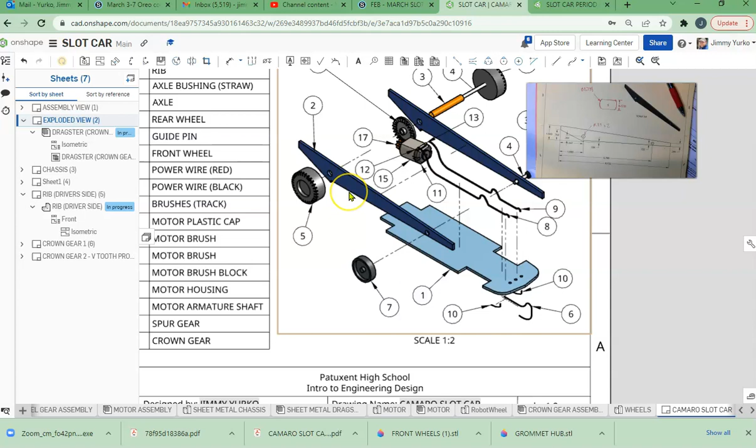Hi folks, right now we're going to go ahead and create the ribs, these blue ribs for our slot car. They are part number 2 on our drawing, and they are what's going to be attached to the blue chassis that we created the other day. And they provide us holes for the axles to pass through, and they add stiffness to the model.

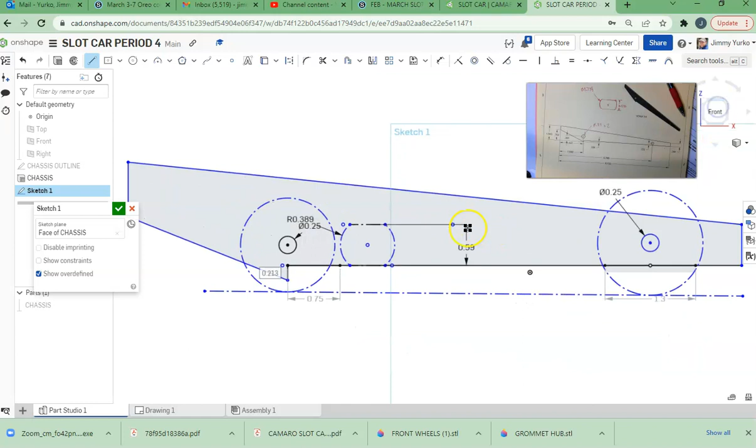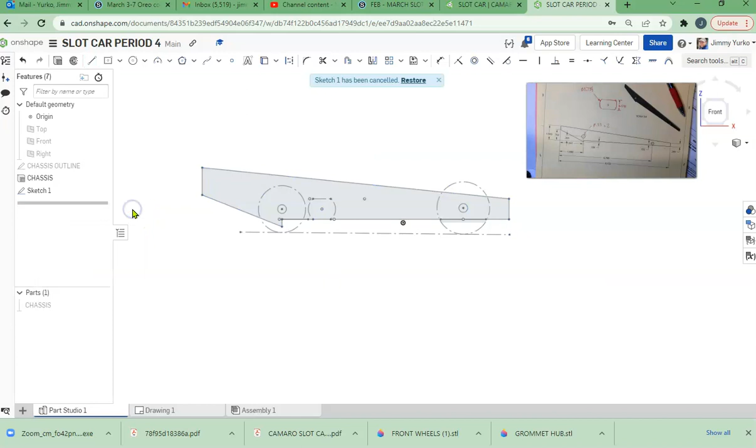The drawing we're going to create is going to look kind of like this. And I'm going to kind of quickly go over how to put these together. The process is pretty simple. I'm going to actually delete everything I have here and start over, just so you can see how this works. So I've got my chassis, and we're going to add a sketch to the plane that we want to put that on.

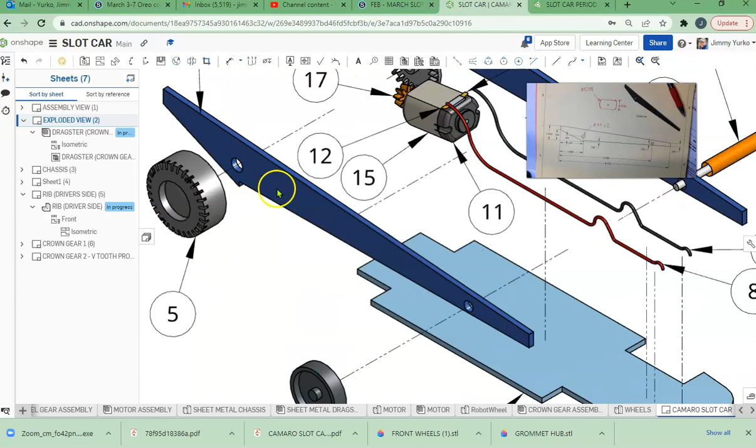So if you look here, the outside edge of this rib, this outer face right here, is going to line up with the inner face of the wheel cutouts. So we're going to go ahead and put that sketch plane on this vertical plane. That is where we're going to create the rib, and it will start here, it'll be drawn here, and then projected to the right.

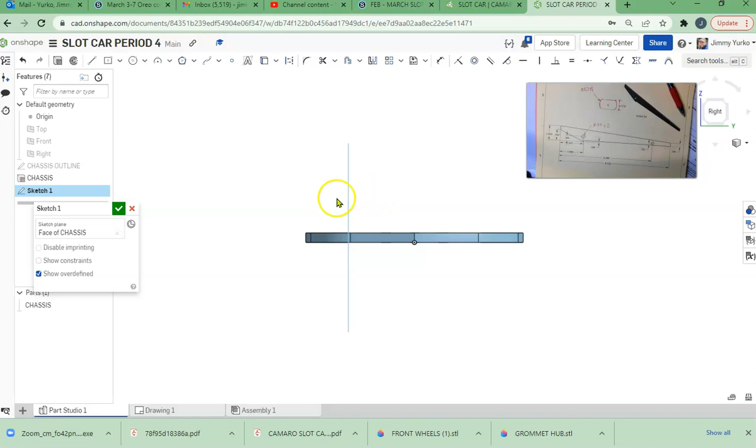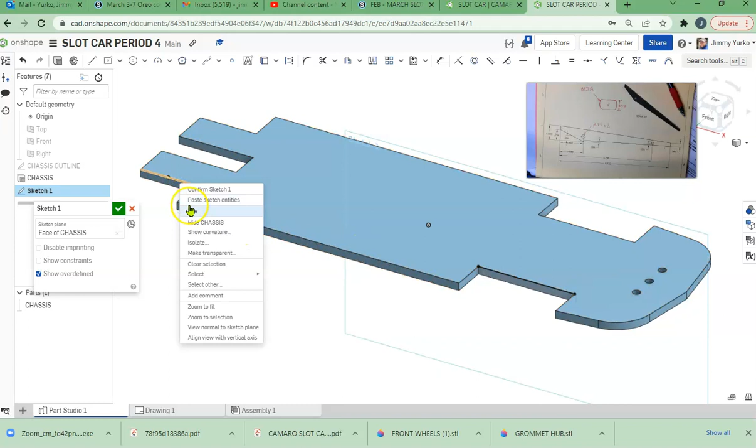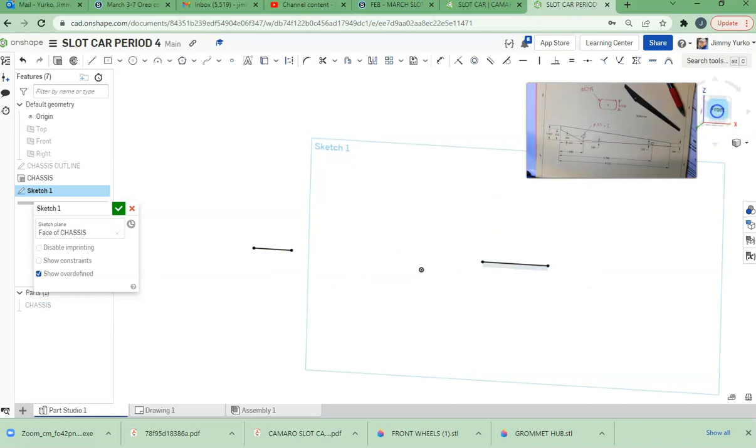We're going to need to take some of the existing geometry, which you can see is there. I can right click on the edge of the wheel well, and then right click on the edge of the rear wheel well. We now have lines on our sketch that we can use. And over on the left hand side here, I've got this eyeball to turn the chassis on and off so we can get it in and out of our view. For most of today, we're going to turn that off.

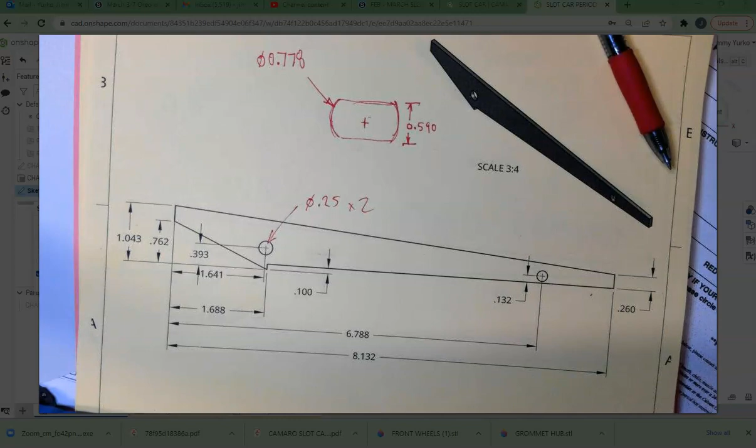We're going to be creating this shape right here. Here's our wheel axle holes, in front and rear. The rear axle hole is lined up above the back edge of our model. Let's go back to our model and see that the rear axle hole is off the back of the car, and the front axle hole is lined up over the center of that wheel well.

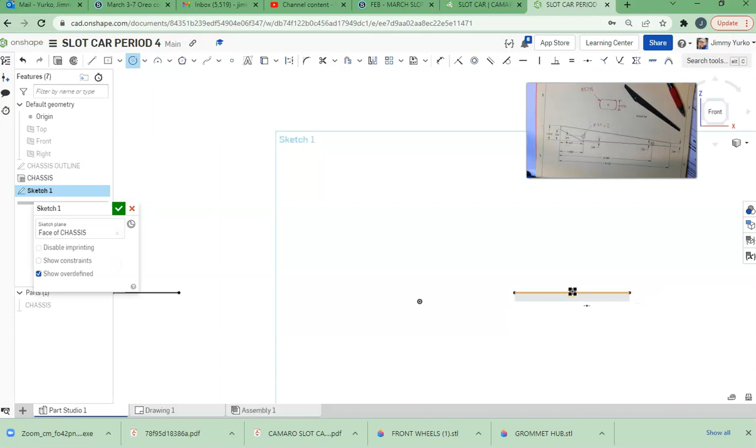Looking at our examples, we're going to take a circle, and I'm going to hover over the rear edge of our first line and create a circle. And then for the front, we'll find the midpoint. So a little square pops up, and you can see the midpoint constraint. That's the horizontal line with the bubble in the middle, above there. And that creates circles that are vertically aligned with those wheel openings.

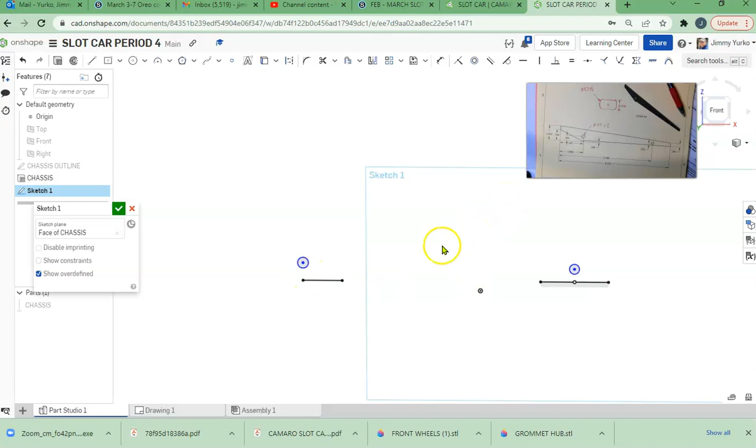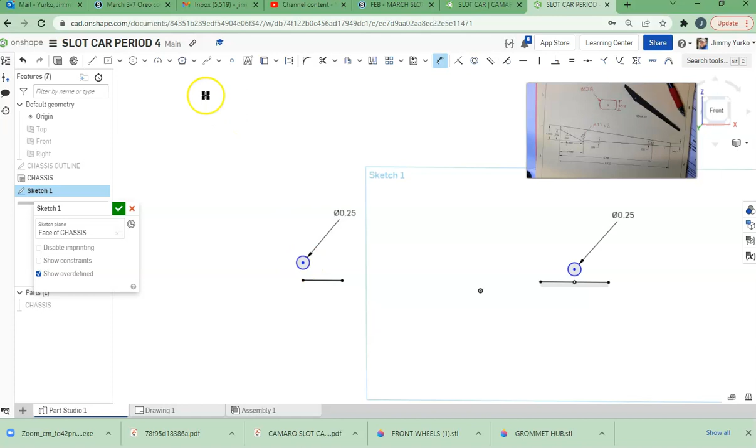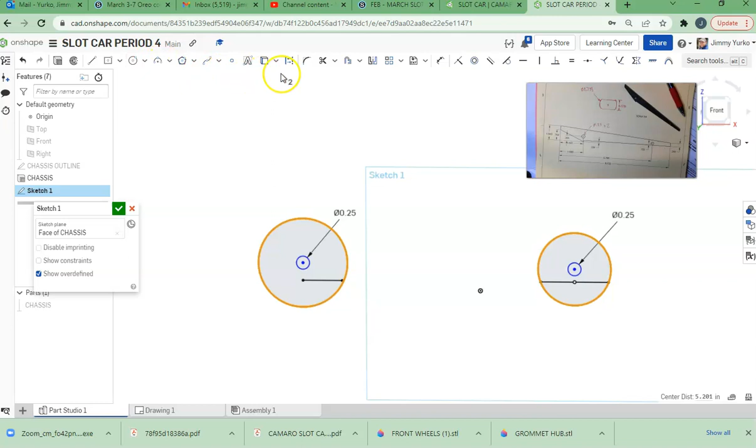And then we need to take into account how big are those? Let's make those a 1/4 inch. It's a pretty common size, easy for us to work with. And then we need to figure out how high they're going to be and how big they're going to be. Well, these are going to be attached to wheels. So let's draw those wheels, but we don't want to make those wheels part of our chassis. We're going to make those construction lines so we can just see how they relate to each other.

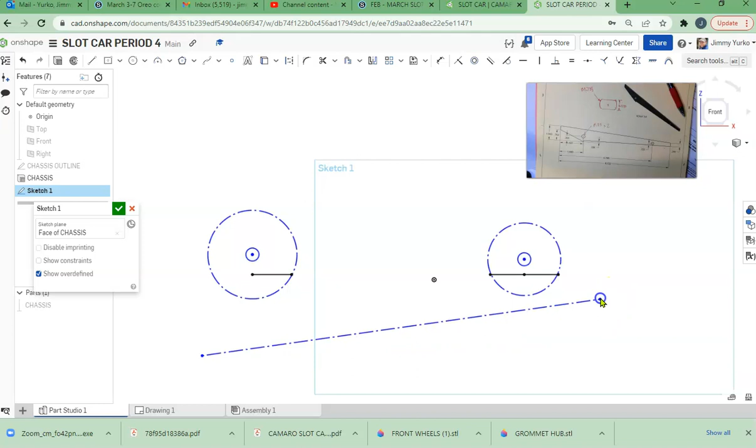And of course, those wheels have to ride on the ground. So I'm going to draw a line that represents the ground. And you notice that I created that intentionally at a really screwy angle, because I want to make sure that I'm able to move it. Of course, the wheel should contact the ground, so that is the definition of tangent. So I'm going to take the tangent tool and grab the circle and the line, and grab the circle and the line. So now my rear wheel and my front wheel are attached to the ground, and I can adjust my ride height for my vehicle.

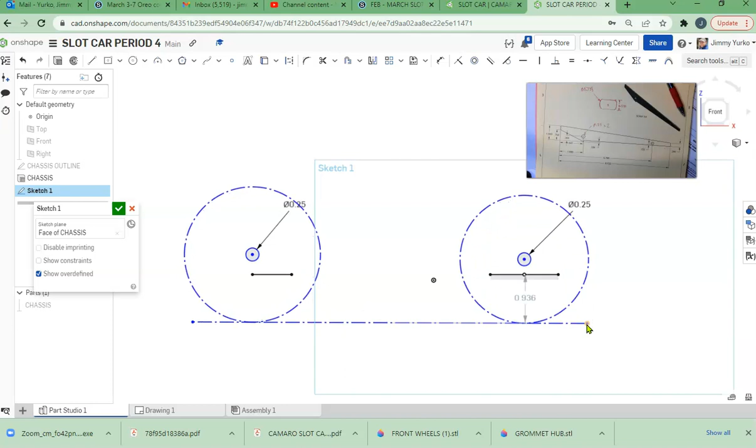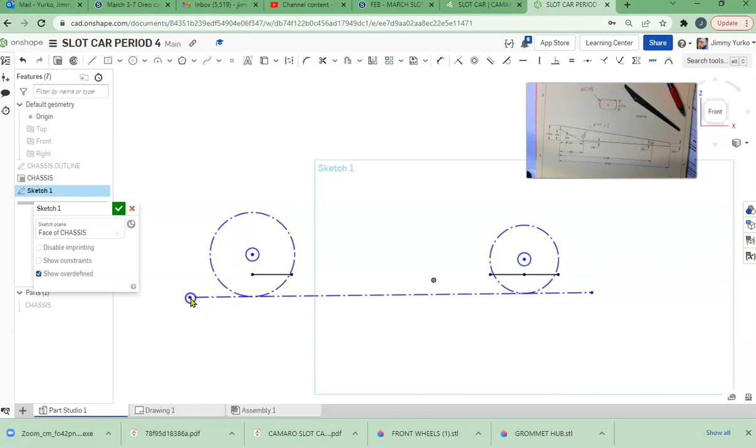So the bigger the wheels, the bigger the space between the ground and the bottom of the car. So here's the bottom of the car, here's the ground, and you can see that as those wheels get bigger and smaller, that ride height changes. I want to have a pretty short ride height, somewhere in the neighborhood of 1/4 of an inch. So it should be 0.25 inches. I can tweak that by adjusting our wheel sizes. Also, we can adjust the ride height and wheel size by moving the axle holes up and down.

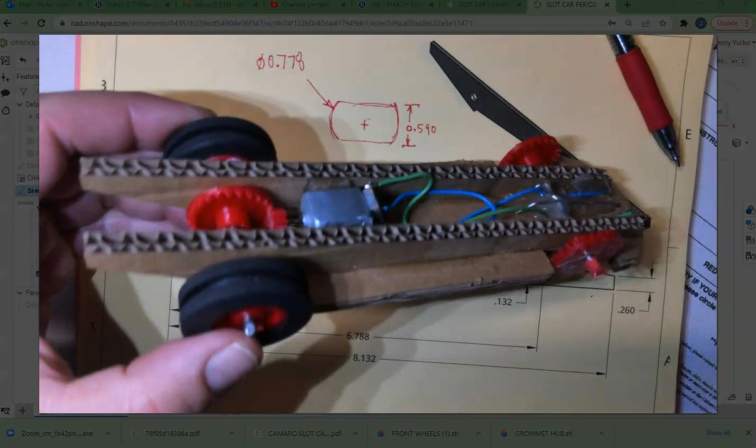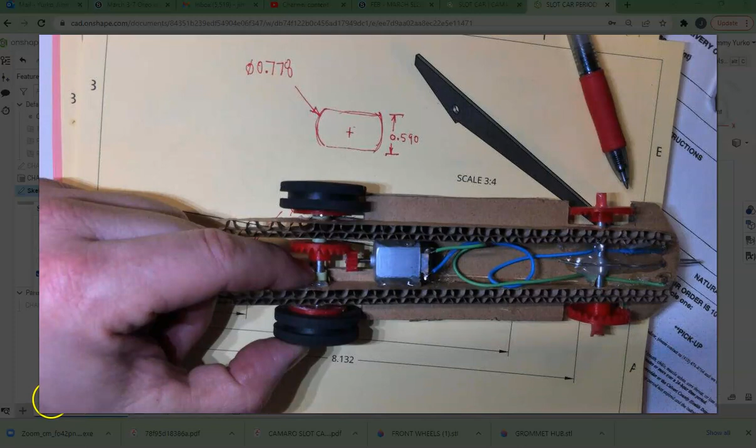We need to make sure that our rear wheel lines up with our motor. So you can see that on our slot car, we've got a motor that provides power to our wheels, and we want the center of the motor to line up with the center of the rear axle. So we're going to sketch this profile, which looks like the end of the motor, right here so we know where it is. And honestly, all we care about is how tall it is. So I'm just going to use the center point rectangle and oversimplify the system.

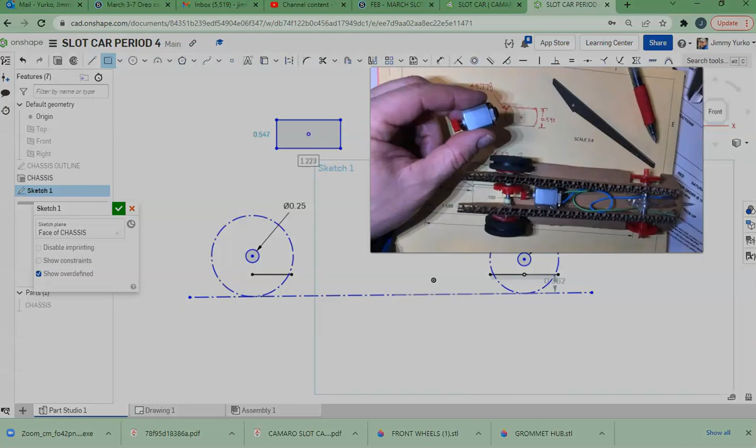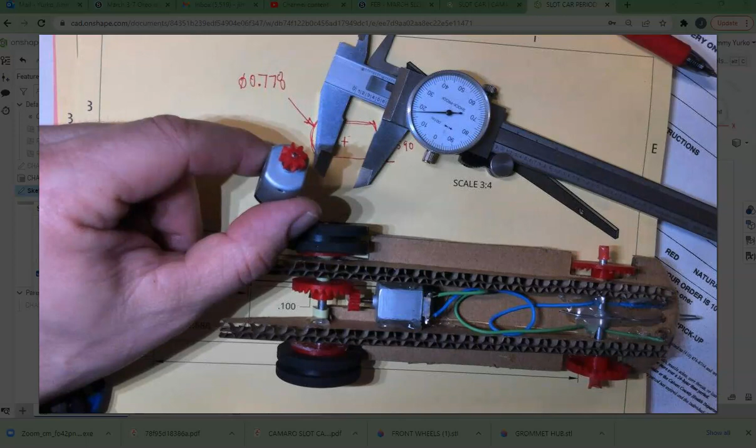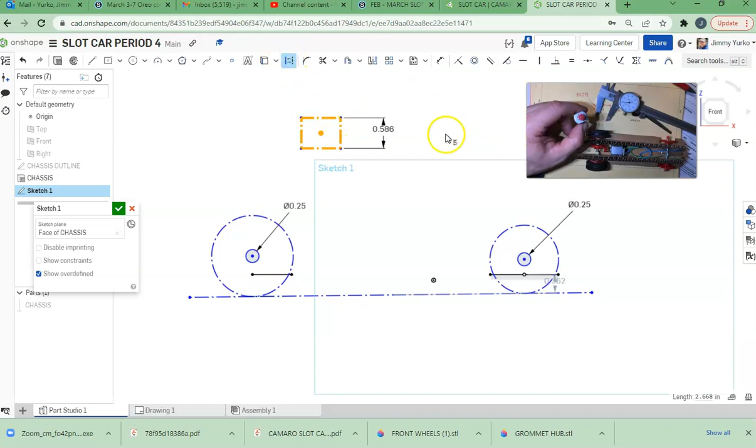And the height of that motor is 0.586 inches tall. So we just add a dimension to that. 0.586 inches tall. I don't care how wide it is. That really doesn't matter to us. I recognize that our motor isn't square, but that's close enough for what we need. And we don't want that to become part of our model, so I'm going to make that a construction line. Oops.

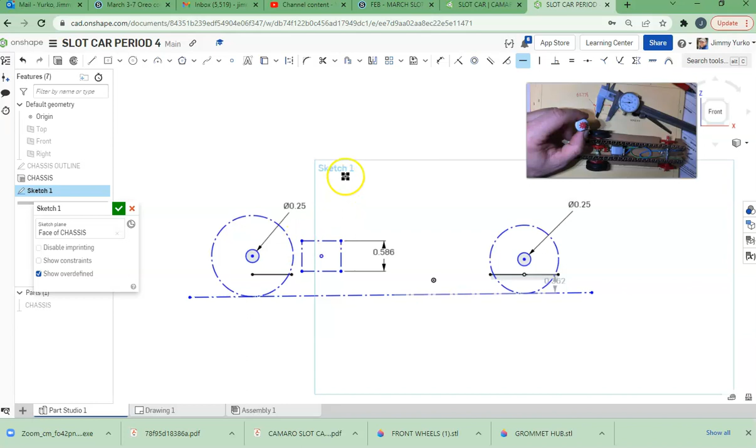The bottom of our chassis is right here, and we want that center of the motor to line up with the center of the rear wheel. So let's get these two centers aligned and use the horizontal constraint. So we'll apply the center point to center point. So now, whenever I move one, the other changes. And then, of course, we want the motor to sit on the chassis. So we'll horizontally constrain the bottom of the motor to the top of the chassis. And now we're in great shape.

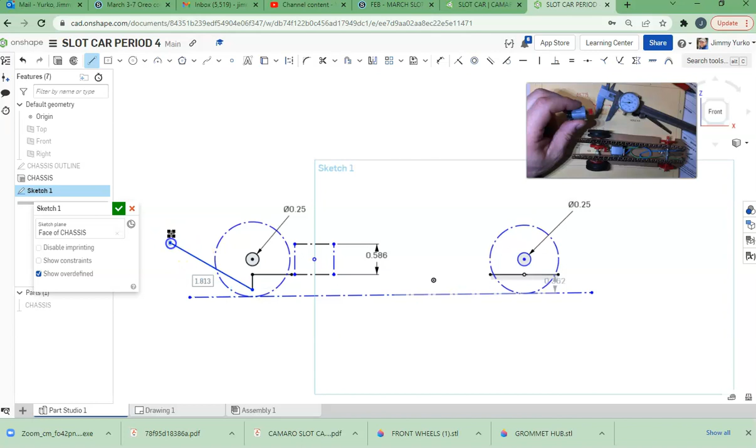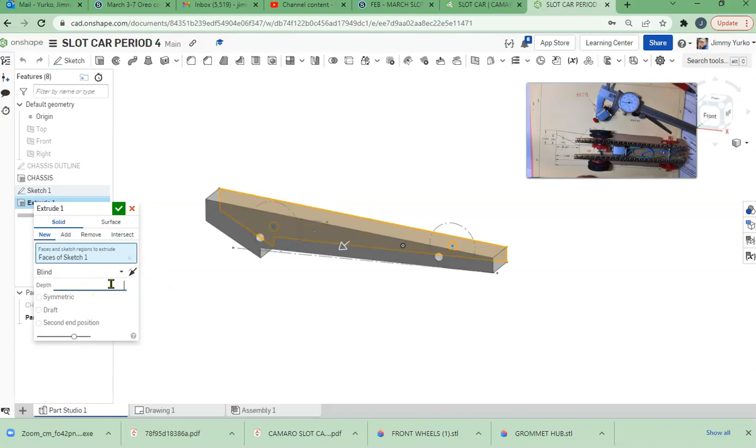All we have to do now is figure out the outline of our ribs, and then finish constraining it. When we go ahead and extrude this, you see the holes are already there. I'm going to go at 0.1 inches thick, and change the direction so it goes the other way. Matter of fact, let's turn that chassis on so you can see what the heck we're creating. And finish the check. So that's what it takes to get that figured out.

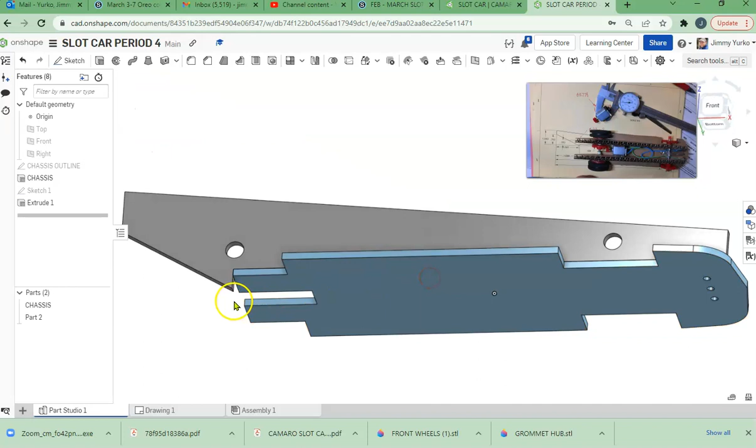You want to go back into the model and tweak your sketch to make it the exact size you're looking for. You can refer to your drawings, and you can refer to the other parts in the model to get the correct sizes.